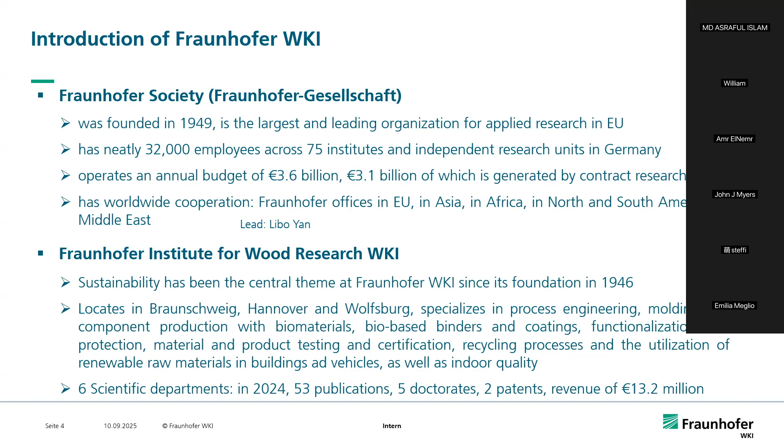All right, let us get started with a very brief introduction about my organization. For those of you who are not familiar with the Fraunhofer Society, it's the EU's largest organization for applied research, employing nearly 32,000 staff across 75 institutions in Germany. The Fraunhofer Society operates an annual budget of 3.6 billion euro, with 3.1 billion generated by contract research.

The Fraunhofer Institute for Wood Research is one of those institutions, located mainly in Braunschweig, Hanover, and Wolfsburg, with sustainability as the central focus for over 75 years. We have 6 scientific departments working on forest, wood, material testing and certification, as well as recycling and processing of building and construction demolition waste, and indoor air quality for structural application. Last year, we had 53 publications, 5 doctoral graduates, and 2 patents, generating a revenue of over 13 million euro.

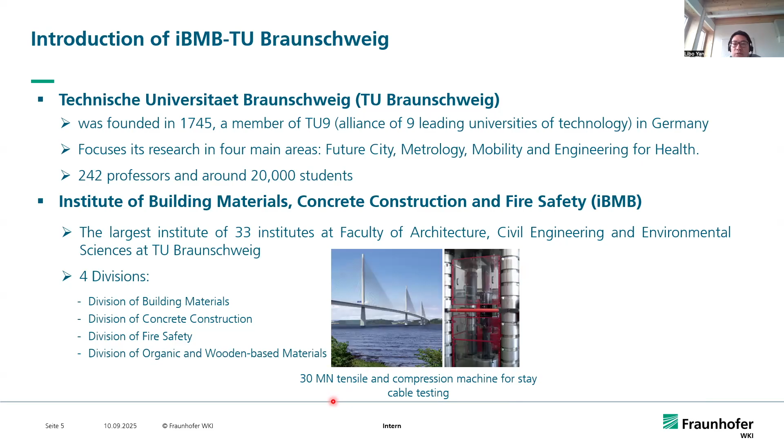Regarding TU Braunschweig, it is one of Germany's oldest universities and a member of TU9, an alliance of the 9 leading technical universities. It hosts the Institute of Building Materials, Concrete Construction and Fire Safety, IBMB in German, which is the largest institution at the Faculty of Architecture, Civil Engineering, and Environmental Science. At my institute, IBMB, we have state-of-the-art testing facilities, like a very unique 30 million Newton tensile and compression machine for stay cables. We also have Europe's leading testing facilities with a capacity of heat release rate up to 20 million watts.

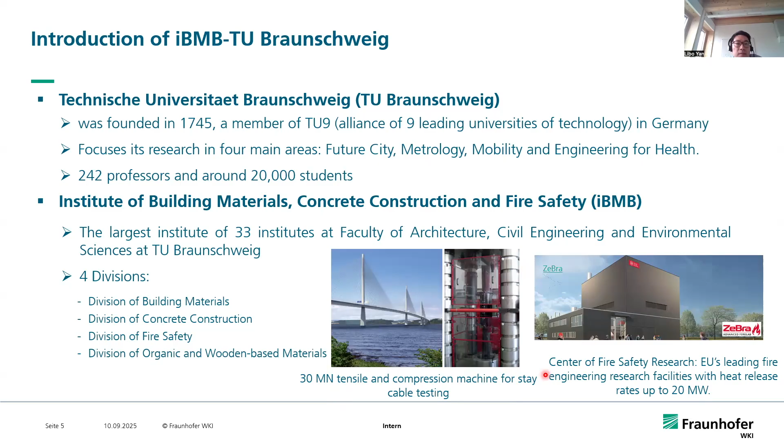So let us move on to the questions: what are natural fibers, and why should we use flax fibers to replace glass fibers for composite applications?

First, I will give a brief introduction about the classification of the polymer matrix and fiber materials. Based on the response to heat, the polymer matrix can be divided into thermoplastics and thermosets. In general, thermosets have better tensile properties, durability, and thermal stability, which are suitable for civil engineering applications, for example like epoxy.

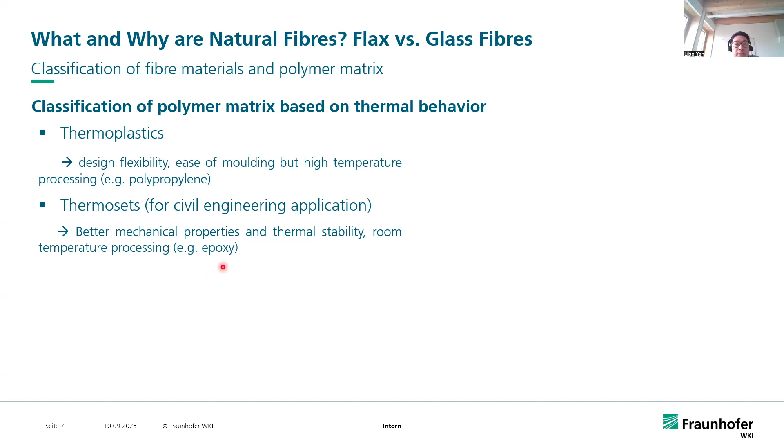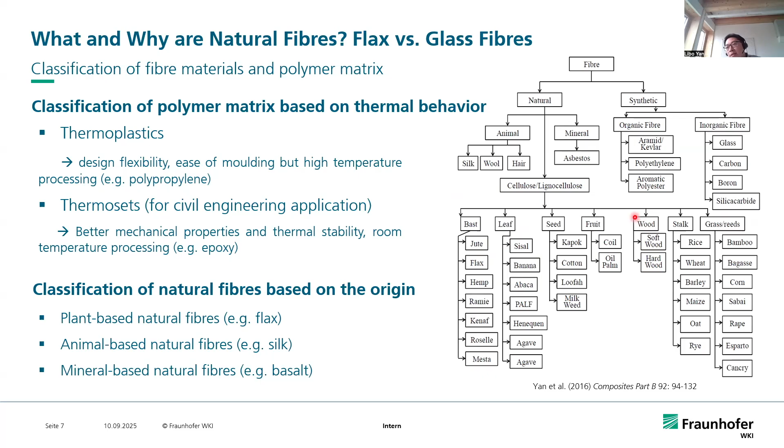For fiber materials, we have synthetic fibers like glass fiber, carbon fiber, and aramid fiber. For natural fibers, mainly based on fiber origin, we have mineral-based natural fibers, nowadays mainly basalt fiber, which is widely used in civil engineering; animal-based natural fibers, like silk and wool; and plant-based natural fibers, which is the focus of this talk: flax, jute, and also wood, since wood is also a kind of plant-based natural fiber.

So why should we use plant-based fibers? First of all, they are a renewable resource, coming from agriculture waste, using them to support circular and bioeconomy development. They have the potential to reduce greenhouse gas emissions, and normally the production of plant-based natural fibers is a less resource-intensive process, with less water, energy, and waste generated.

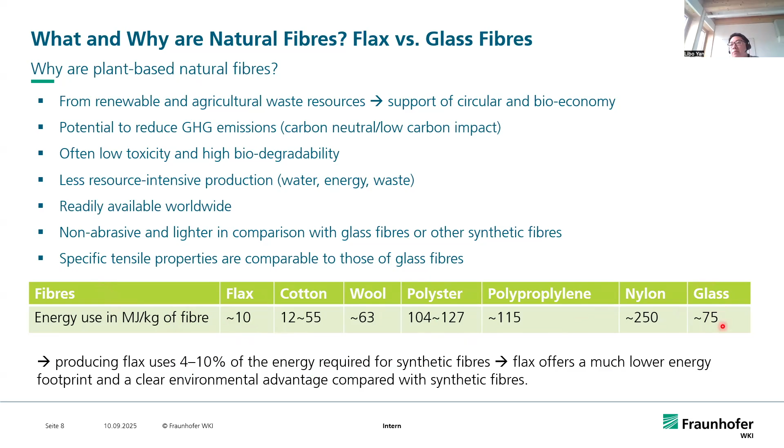Natural fibers are readily available everywhere. They are lightweight and cheaper compared with synthetic fibers such as glass. Most importantly, the specific mechanical properties of some plant-based natural fibers are very comparable to those of glass fibers. In this table, we can see that for the production of 1 kilogram of flax, the energy needed is much lower compared with other synthetic fibers such as glass. Overall, flax fiber offers a much lower energy footprint and a clear environmental advantage compared with synthetic fibers used in composite engineering.

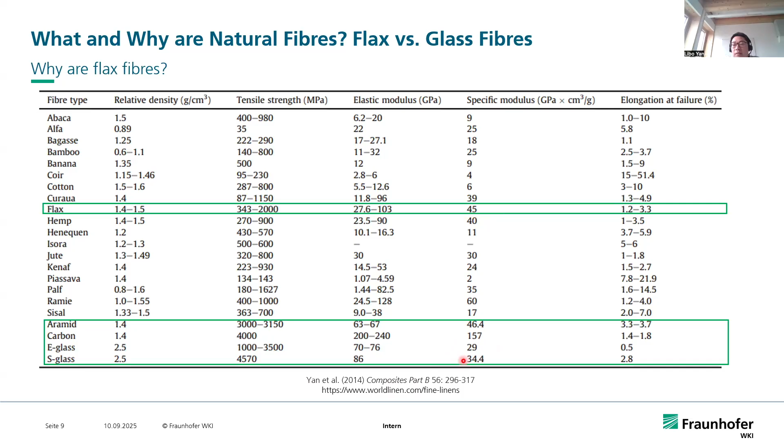Let's take a look at the specific modulus, for example. The flax fiber has a specific modulus higher than most of the plant-based natural fibers, which is even higher than that of e-glass fibers, as you can see here. So that's why flax fiber combines lightweight, renewability, and glass-comparable stiffness, making flax fiber highly attractive for composites in construction applications.

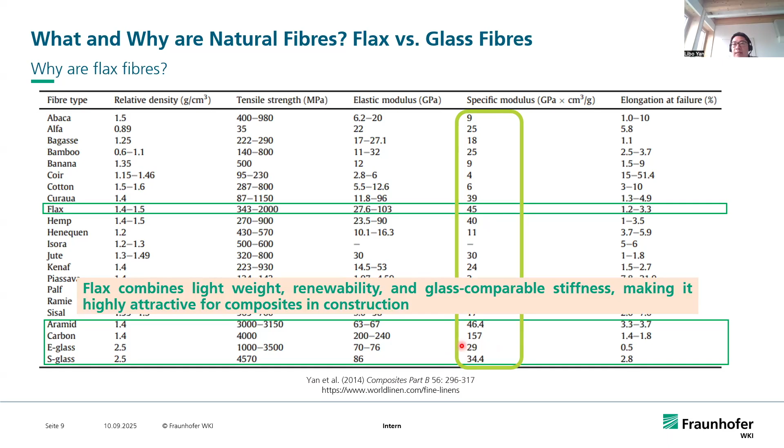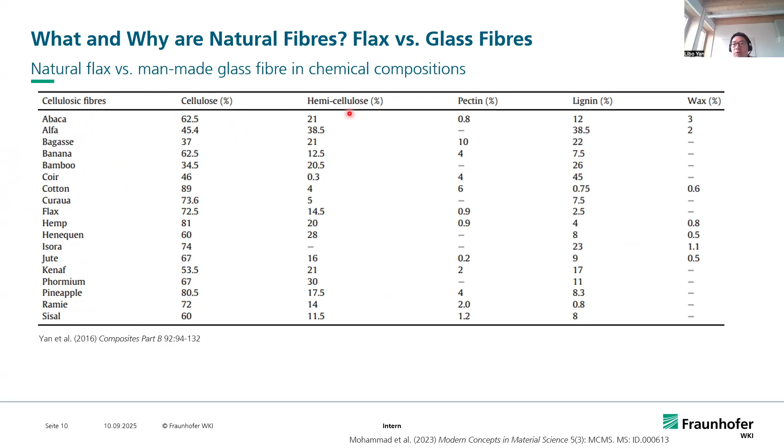By contrast, glass fibers have a stable chemical consistency, which is mainly dominated by silicon, around 54% to 65%, with other different oxides to change the function.

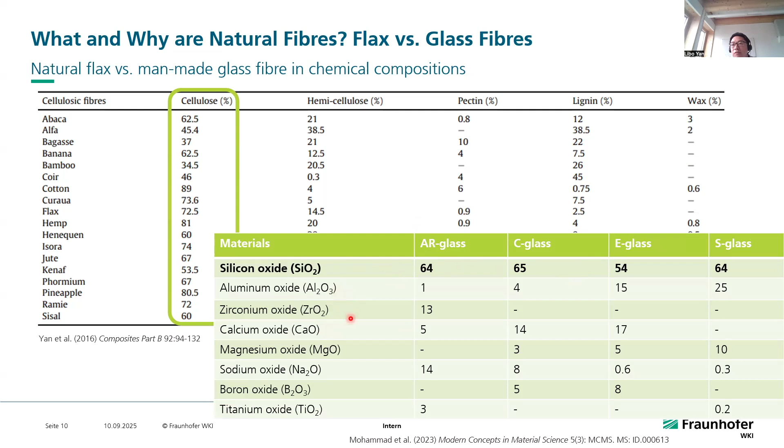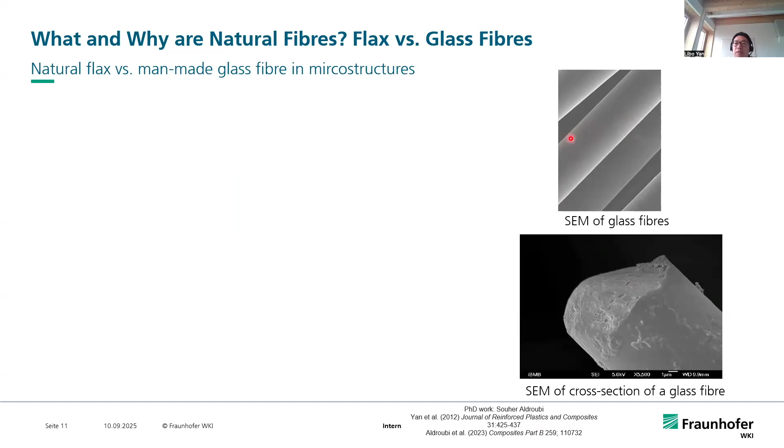So how about the comparison of microstructure between flax fiber and glass fiber? Let's take a look. For glass fibers, which have a very uniform structure, you can see a very smooth surface, and the diameter is quite constant along the length.

But for plant-based natural fibers, like flax fiber, which show high variation, you can see the existence of natural defects, like kink bands, and non-continuous diameters along a flax fiber, and also the irregular cross-section of individual fibers.

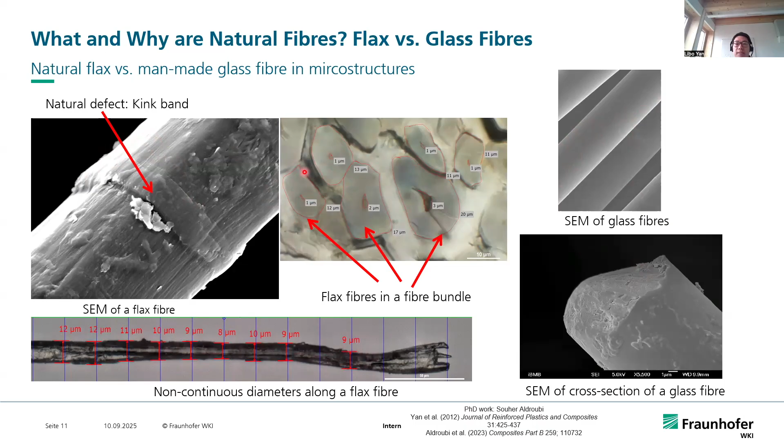After that, they go through the drying process once again. The stalks of the flax plants were broken, scutched, and hackled, so we get the final short fibers. These short fibers can be further processed into fabrics for composite application. The short fibers are spun into yarns, and the yarns are woven into different fabrics for engineering application.

In my institute, we have a textile machine which allows us to design fabrics with different textures.

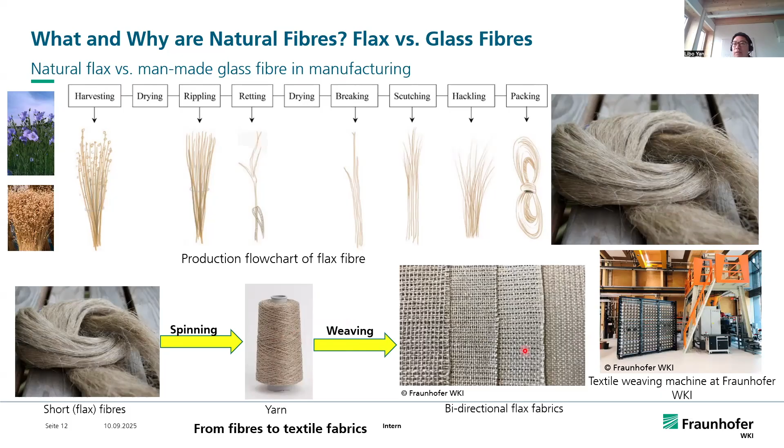Let's take a look at the manufacturing of glass fibers. I would say the production of glass fiber or glass fiber yarns is an industry-standardized process. Raw materials like silicon and calcium oxide are mixed and melted in a furnace at a temperature of about 1,700 degrees Celsius to form a homogeneous glass.

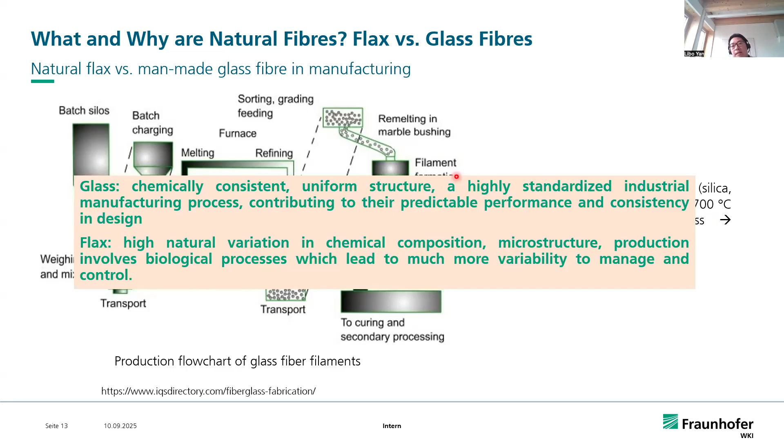After that, it's refined and drawn into glass filaments with very constant structure. In comparison, we can see glass fibers on one hand are chemically consistent, have a very uniform structure, and a highly standardized industry process, which contributes to predictable performance and consistency in design for engineering applications. But flax fibers have high natural variation in chemical composition and microstructure. The production involves biological processes like retting and mechanical processes like scutching, which leads to much more variability to manage and control.

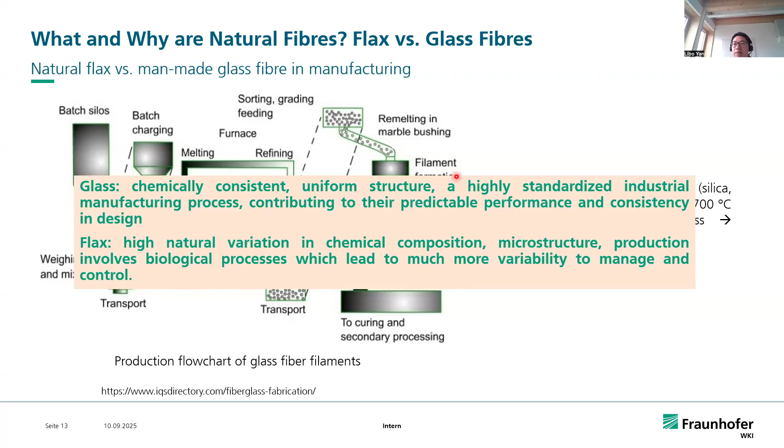So after the comparison between flax and glass fibers, let's take a close look at the mechanical performance of flax fiber, yarn, fabrics, and FRP composites.

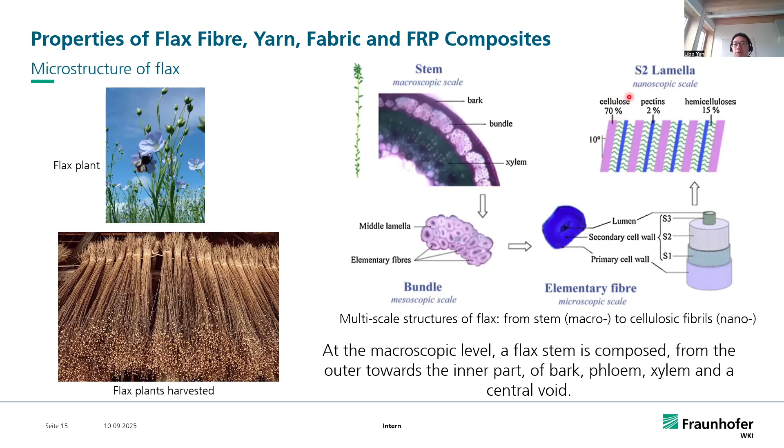At the nanoscale level, we see the chemical compositions bonded together, meaning the cellulose, pectins, and hemicellulose.

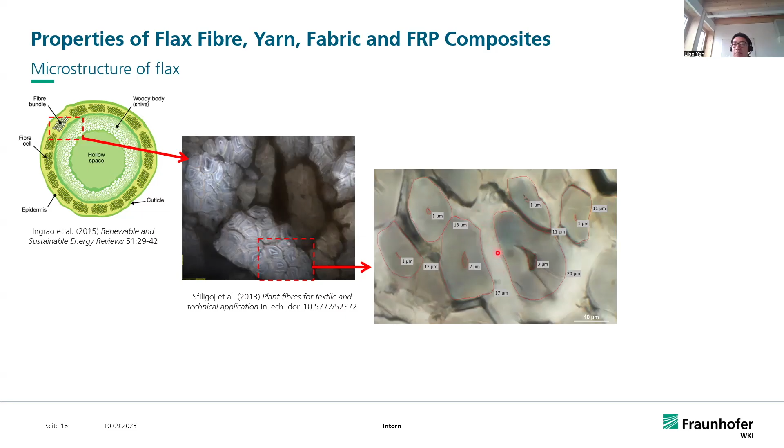Let's move on and have a close look at the fiber bundle. The fiber bundle is the component we use to extract flax fibers to produce textiles. As you can see under the microscope, we can see the individual flax fibers, which are connected at the so-called middle lamella by pectin. Each fiber has a multi-cell structure, which will be discussed further in the coming slide.

Let's take a look at the schematic of the flax single fiber, which is mainly composed of the primary cell wall and the secondary cell wall. The secondary cell wall encloses the hollow lumen, which is responsible for water uptake.

The secondary cell wall can be further divided into S1, S2, and S3 layers. The S2 layer has the largest thickness and contains most of the microfibrils. The cellulose microfibrils are the components that determine the tensile strength and tensile modulus of the flax fiber.

Those microfibrils are further orientated with an angle around 10 degrees with the longitudinal direction of the fiber. This microfibril angle also significantly determines the mechanical performance of the fibers. In general, a plant-based natural fiber with a smaller microfibril angle will have higher tensile strength, while a larger angle means smaller tensile strength.

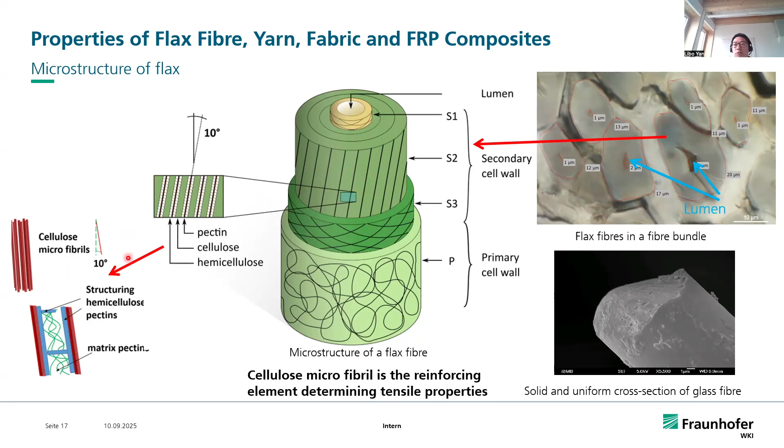Let's move on to the tensile properties of the single flax fibers. The flax fibers are extracted from a yarn of unidirectional flax fabrics. In these tensile stress-strain curves, we can see significant scatter of the results. On average, the tensile strength of the single flax fiber is around 850 to 1000 megapascal, the modulus is about 55 to 63 gigapascal, and the failure strain is about 2%.

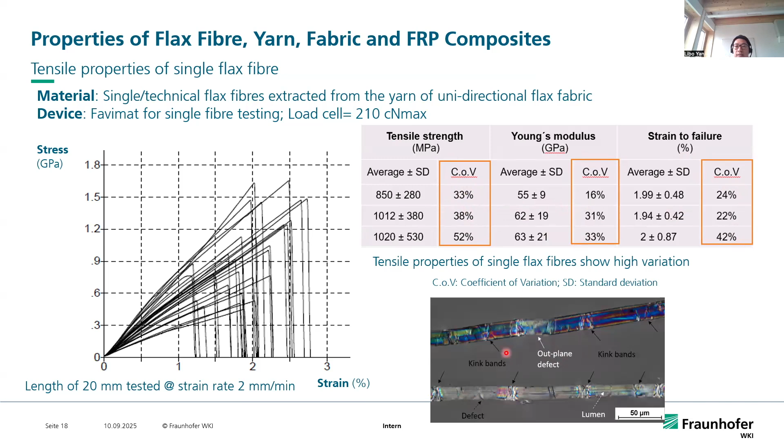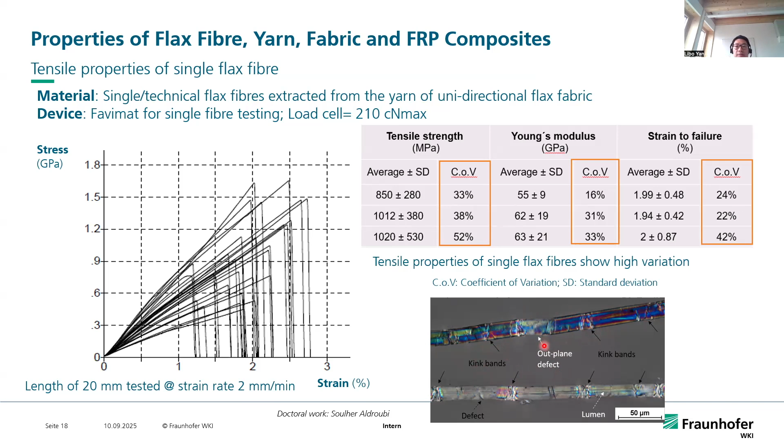Next, let's move on to the flax yarn. The flax yarns are also extracted from the same fabric. The average tensile strength is about 600 megapascal, a significant reduction from the 800 to 1000 for the single fiber. There was also a significant reduction in the modulus of elasticity compared with the single fiber.

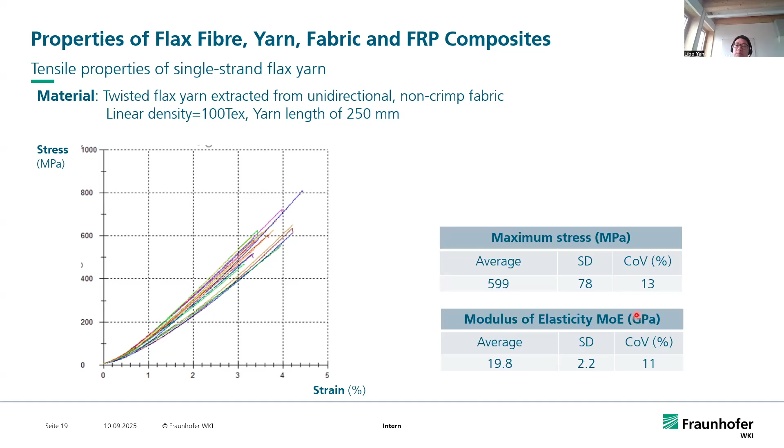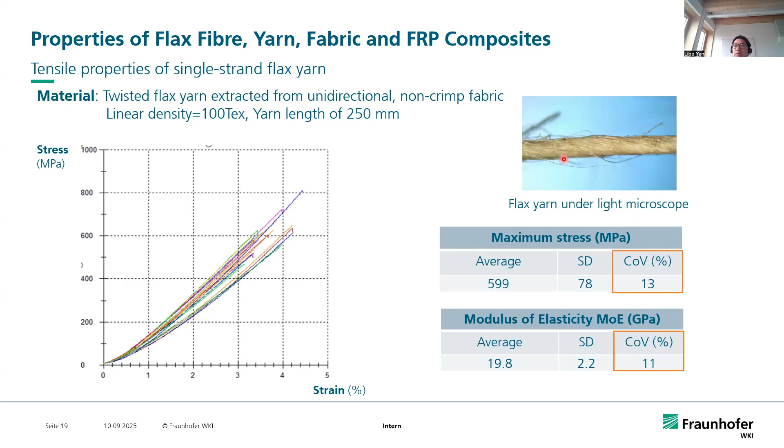But what is interesting is the reduction in the coefficient of variation, from 20 to 50% for the single fiber dropped to 11 to 13%. What does that mean? It means when we twist the short fibers into yarn, we are able to reduce the variation and make the properties much more predictable.

Let's continue and move on to the tensile properties of the unidirectional flax fabrics. There is a further reduction in the tensile strength from 600 megapascal of the yarn to roughly 210... for the fabric, and the modulus is also reduced significantly. It's quite interesting - let's take a look at the coefficient of variation, less than 10%.

So from the evolution of the mechanical properties of the flax fiber to yarn to fabrics, we can see the absolute values like tensile strength and tensile modulus decrease, but the behavior becomes much more predictable and consistent. This is a clear advantage of using flax fabrics for engineering design and structural application.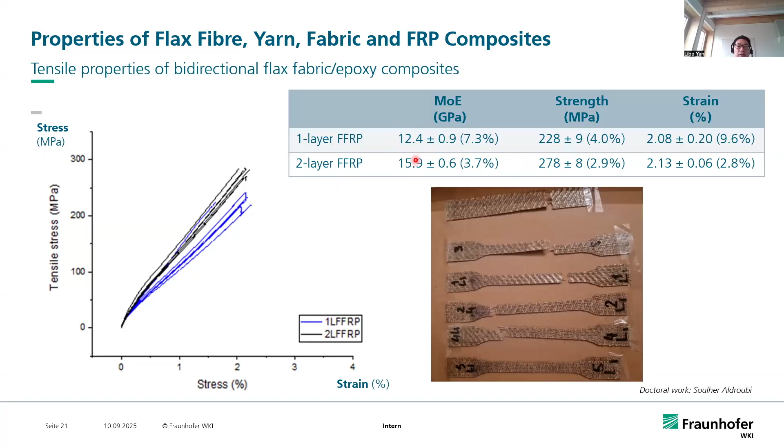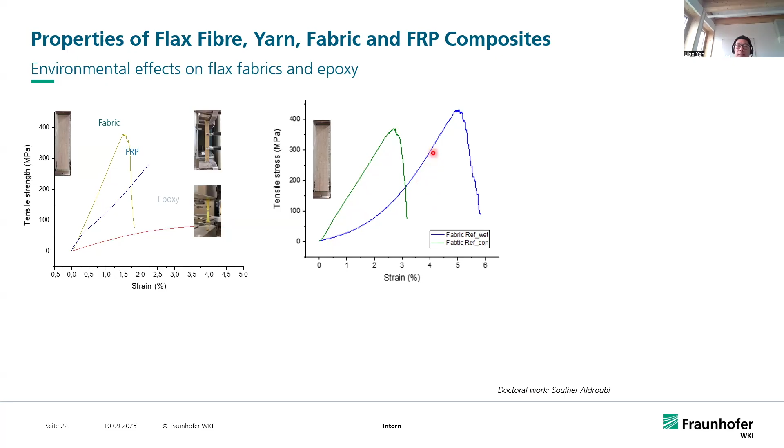In this figure, you can see the flax fabric tested in tension at the dry condition. The blue line is the flax fabric after 24 hours of exposure to water and tested in the wet condition. There was a significant reduction in the Young's modulus, and a slight increase in the tensile strength of the fabrics.

In this figure, we can see for the post-cured epoxy coupon, when tested at the standard condition of 20 degrees Celsius, 65% relative humidity, the tensile strength can reach up to 80 megapascal. But if the coupon is tested at different temperature, we see a significant reduction in the tensile strength for the epoxy itself. So what kind of information can we get from here?

So flax epoxy composites offer good performance, but we need to be very careful and consider the environmental exposure and curing conditions when designing natural fiber reinforced polymer composites for real applications.

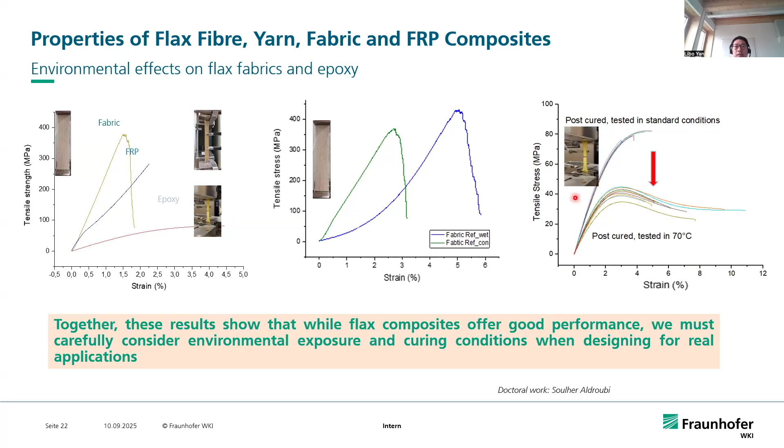Let's move on to the hygrothermal aging of flax epoxy composites at different environment conditions. This figure shows flax epoxy composites exposed in the 70-degree oven for 6 weeks. Here are the reference samples without the 70-degree exposure, and those curves are the samples exposed at 70 degrees for 6 weeks.

We can see compared with the reference sample, there is even a slight increase in the strength and stiffness.

Let's move on to take a look at flax FRP composites exposed to water at room temperature for 6 weeks. You can see compared with the reference samples, there was a significant drop in the tensile strength.

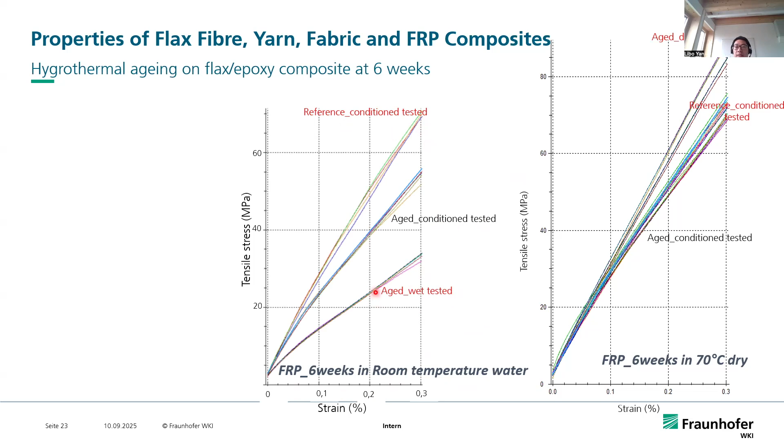Let us take a look at how the flax FRP composites behave at 70-degree Celsius hot water conditions for 6 weeks. Compared with the reference samples, there was a further reduction in the tensile strength.

Those results highlight that moisture is the main enemy of flax epoxy composites. Temperature alone, below the glass transition temperature of the epoxy, is tolerable, but heat plus water accelerated the degradation of the fiber reinforced polymer composites significantly.

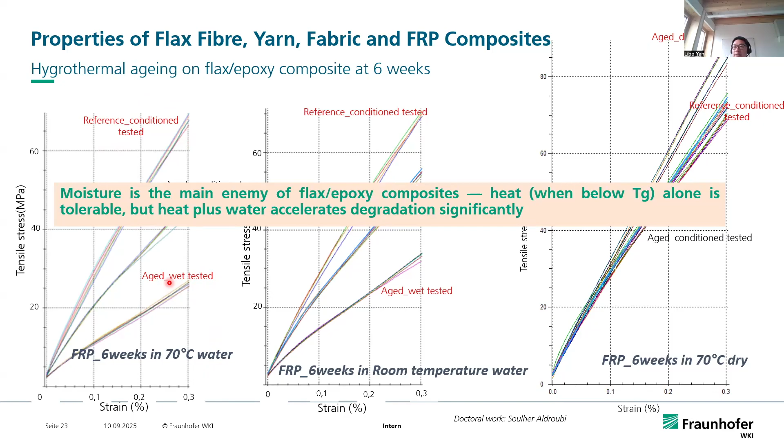Let's have a close look at the hygrothermal aging effect on flax epoxy composites over different exposure times. The left figure gives the flax FRP composite tensile strength exposed to 70-degree oven conditions. Compared with the reference samples, after 3 months, there was only a small reduction in the tensile strength, 8%.

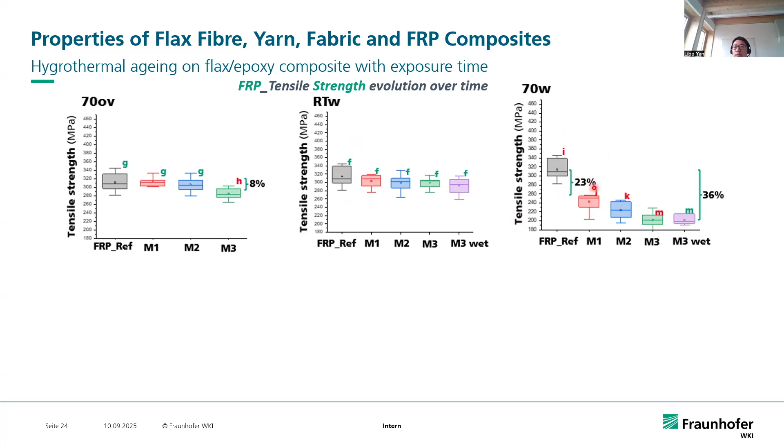For the flax epoxy composites at room water conditions, compared with the reference after 3 months, the reduction is also very small. But when we exposed the flax FRP composites to 70-degree water conditions, even in the first month, we can see a 23% drop in the tensile strength. After 3 months, further reductions were also observed.

Let's take a look at the E modulus of the flax FRP composites over time. For the E modulus, compared with the reference sample, the samples exposed at 70 degrees, we can even see a slight increase in the modulus.

For the composites exposed to water at room temperature, you can see significant reduction at month 1 and month 3. For the composites exposed to 70-degree water conditions, in the first month there was a 32% drop in the modulus, and afterwards further serious reduction in the modulus.

So those results tell us flax epoxy composites tolerate modest temperature, but water, especially hot water, can result in a rapid loss of strength and stiffness over time.

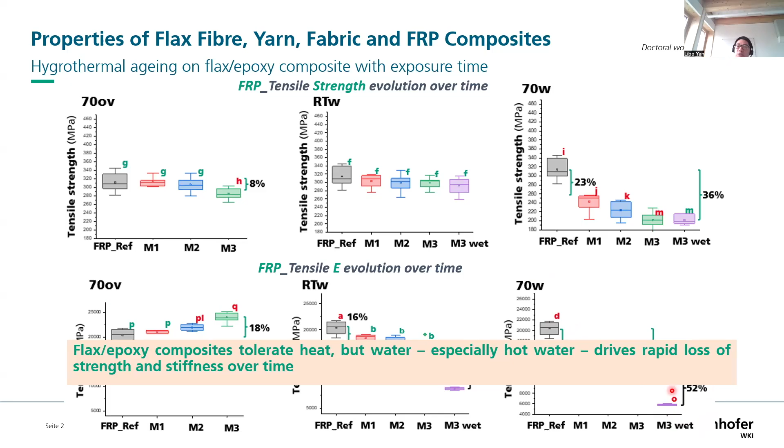So we can make a conclusion here: flax fabric is quite robust under hygrothermal aging, but when the fabrics are combined with the epoxy matrix, the fiber-polymer matrix interface becomes the weak link.

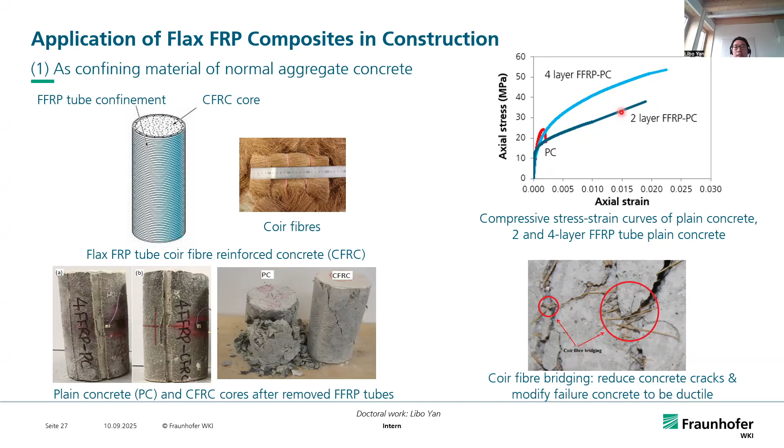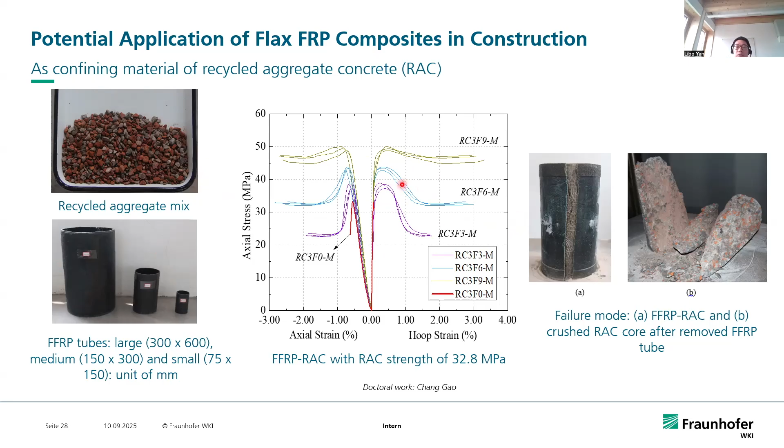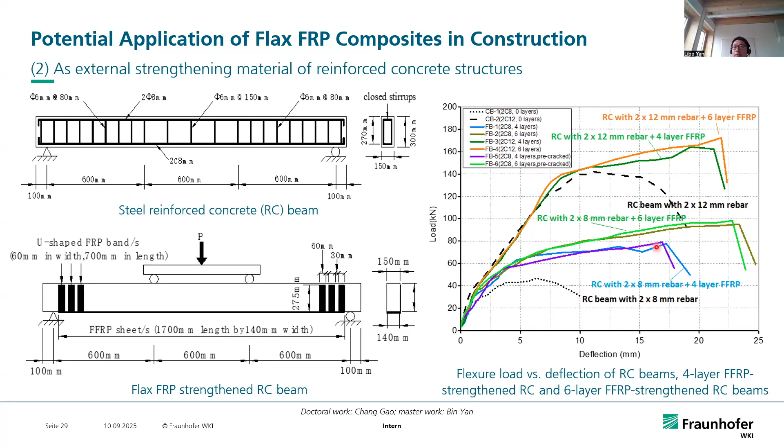Another application of flax FRP is as an external strengthening material for existing reinforced concrete structures. We used U-shape and L-shape flax FRP sheets to reinforce concrete beams. As you can see in the load and deflection curve, compared with the reinforced concrete beam, the use of 4-layer or 6-layer flax FRP significantly increases the load carrying capacity, the ductility, and the energy absorption capacity.

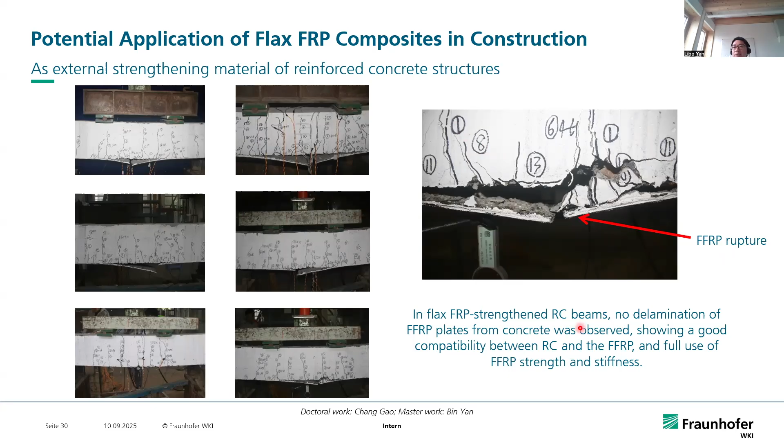It's quite interesting to point out that for the flax FRP reinforced RC beam, the typical failure is rupture of the flax FRP, which means the full tensile strength of the composite can be used. But for traditional glass or carbon FRP strengthened RC beams, we know debonding is always a critical issue.

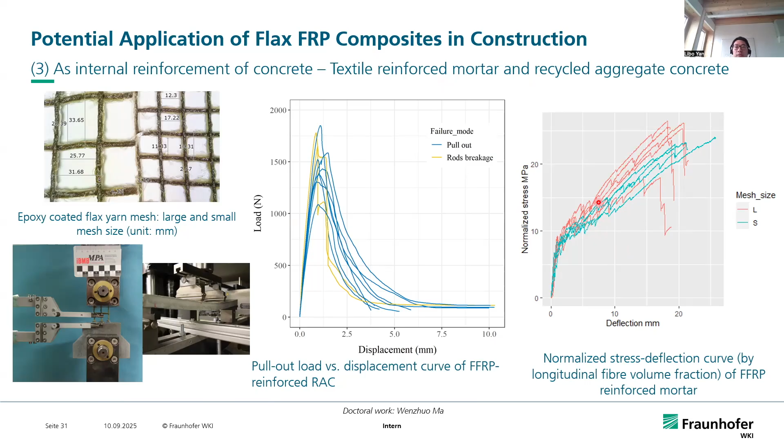Another application is as internal reinforcement of concrete, for textile reinforced mortar or textile reinforced concrete structures. We use epoxy-coated flax mesh as the internal reinforcement to increase the load carrying capacity of the concrete and to modify the crack distribution of the concrete. This is an interesting example using flax mesh to develop textile reinforced mortar, the so-called FlaXship, at the German concrete canoe competition with our students.

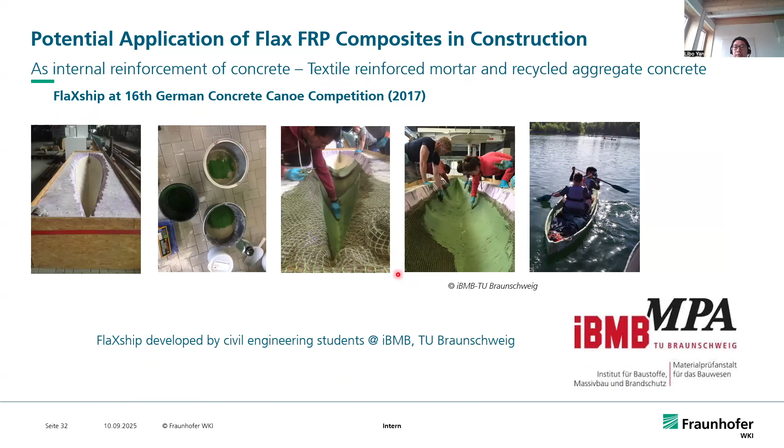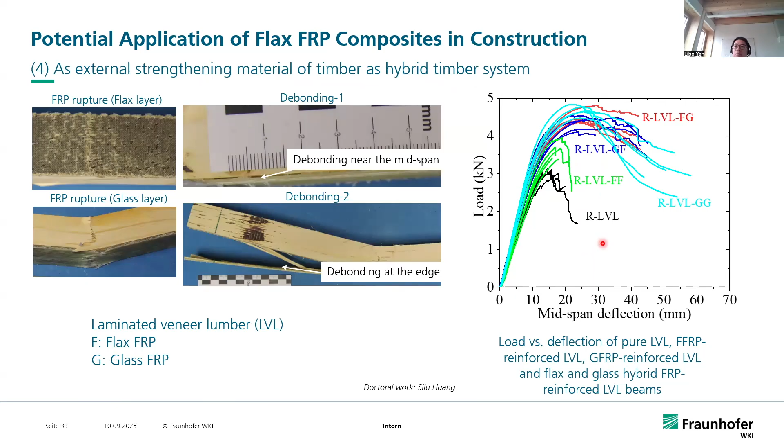In our research group, we also carried out long-term durability tests of full-scale flax FRP wood, carbon FRP wood, and flax-glass hybrid FRP wood panels, exposed to natural aging and sustained loading for almost 2 years. Those long-term tests showed promising results for using flax FRP combined with wood in hybrid system applications.

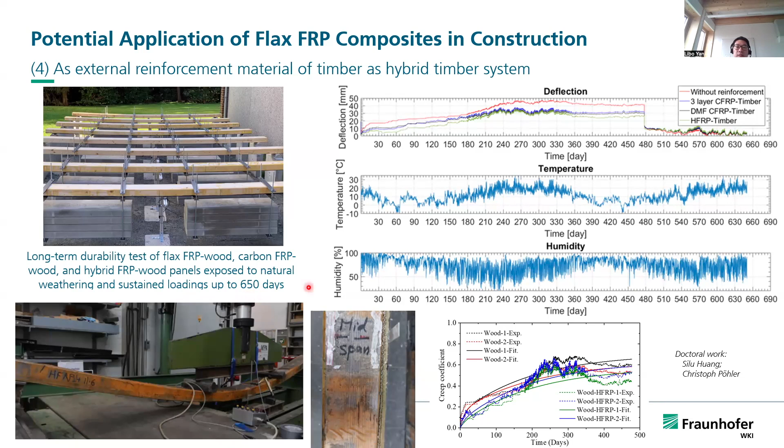Of course, fire safety is a very critical issue for the application of natural flax FRP composites in construction. In our team, we did a lot of research to improve the fire performance of flax fabric reinforced polymer composites, and also with wood.

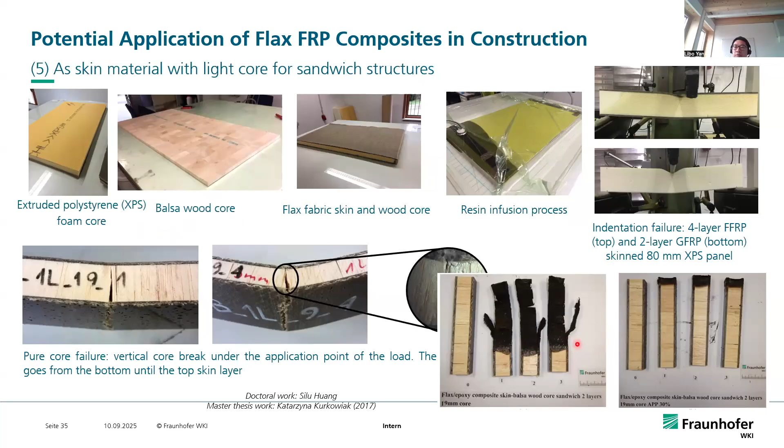After the discussion about potential applications, we move forward to how those concepts can be realized in practice. In the next part, I would like to show some pilot projects using flax fiber reinforced polymer composites in reality, to show the feasibility and performance of flax FRP composites for practical application.

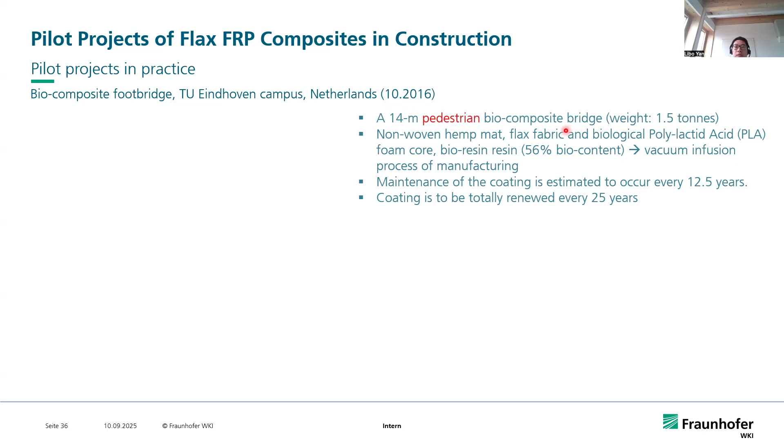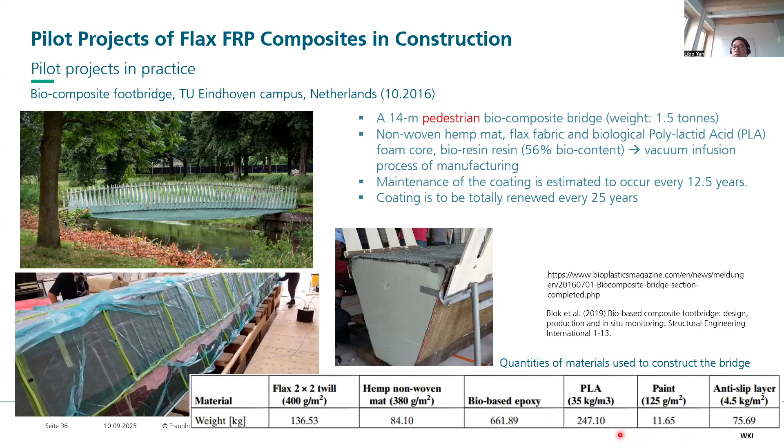The first pilot project is a 14-meter footbridge opened in the Netherlands in 2016. The composite bridge has a weight of 1.5 tons, which is very lightweight, made of non-woven hemp mat flax fabrics and PLA foam core. The mat fabrics and PLA foam are bonded by bio-resin using the vacuum infusion process. In this table, you can see the different materials used for this bridge. This is the first large scale demonstration of biocomposites in infrastructure application.

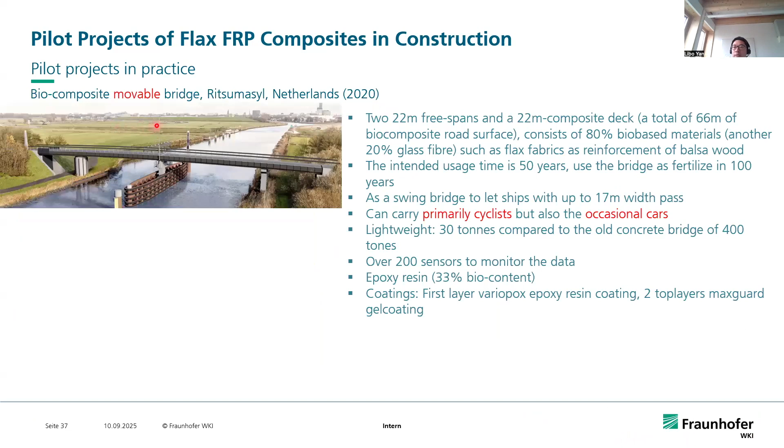In 2020, the world's first biocomposite movable bridge was opened in the Netherlands. This bridge includes two 22-meter free spans and another 22-meter composite deck, in total 66 meters of biocomposite road surface. The composite deck consists of 80% bio-based material from flax fibers, fabrics, and balsa wood, and another 20% from glass fibers. This bridge was designed for 50 years of application, and it is expected that at the end of its service life, the bridge can be used as fertilizer.

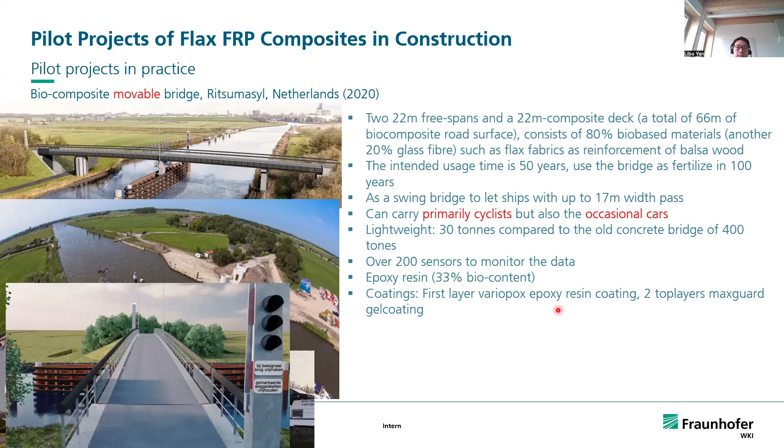This bridge also allows ships to pass by, up to 17 meters wide. It is mainly designed to carry cyclists, but also occasional car transportation. Compared with the older concrete bridge of 400 tons, the composite bridge is about 30 tons, which is a significant reduction. Over 200 sensors were implemented to monitor long-term performance, and coatings are used to prolong the durability of the flax fiber reinforced polymer composites. Here you can see the road surface of the composite deck.

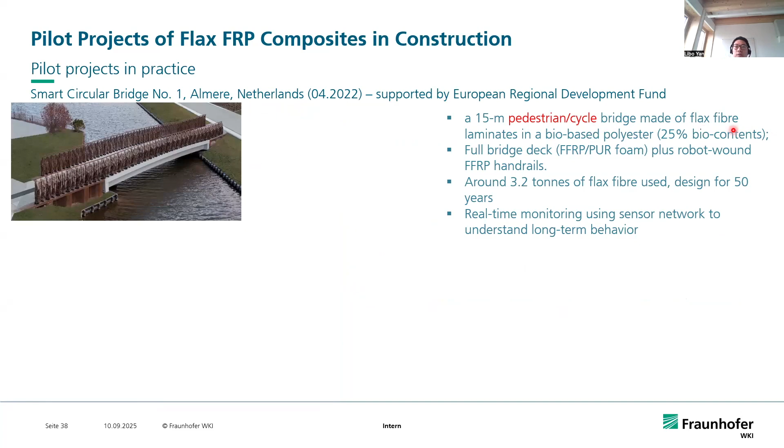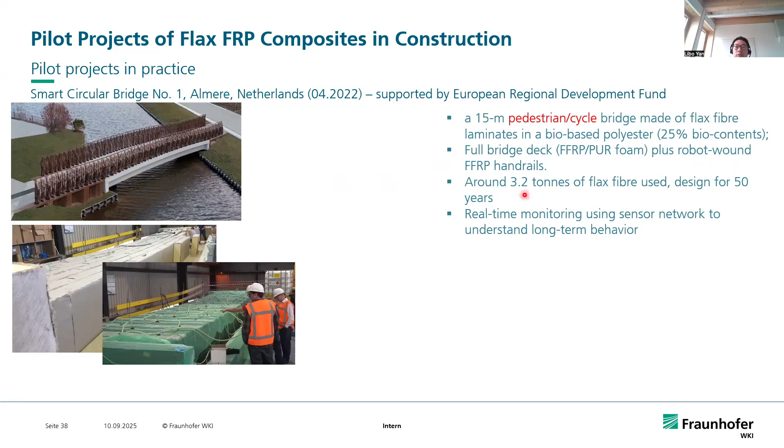In 2022, still in the Netherlands, the Smart Circular Bridge #1 was opened. This is a 15-meter pedestrian and bicycle bridge made of flax fabric composites in a bio-based polyester. The composite deck is made of flax FRP and PUR foam, and robot-wound flax FRP is used for the handrail of this project. In total, about 3.2 tons of flax fabrics were used, designed for 50 years, with real-time monitoring using sensor networks to understand long-term performance.

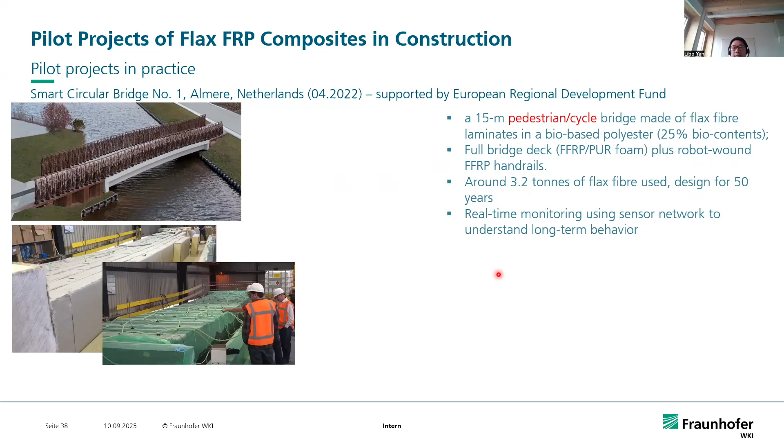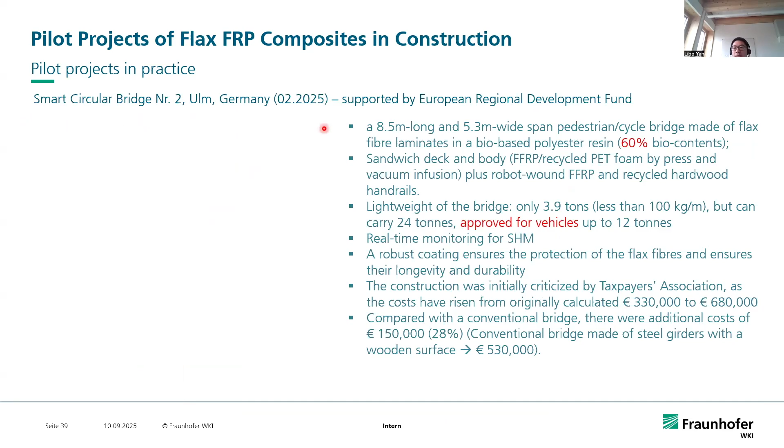All right, let's move on to the last pilot project. The second smart circular bridge opened in Ulm, Germany this February. It's an 8.5 meter long, 5.3 meter wide span pedestrian and bicycle bridge, mainly made of flax fibres and bio-based polyester resin.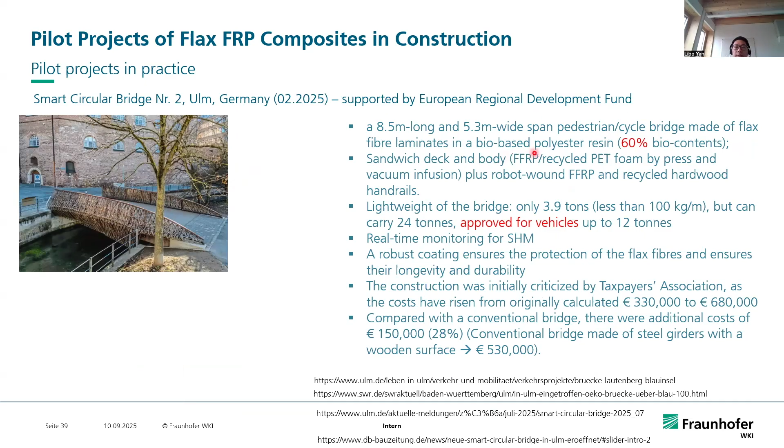The bio content of the resin is increased to 60%. The bridge itself is very lightweight, just 3.9 tons, but very important to know is that the bridge can carry 24 tons of load, and is approved for vehicle transportation every day up to 12 tons.

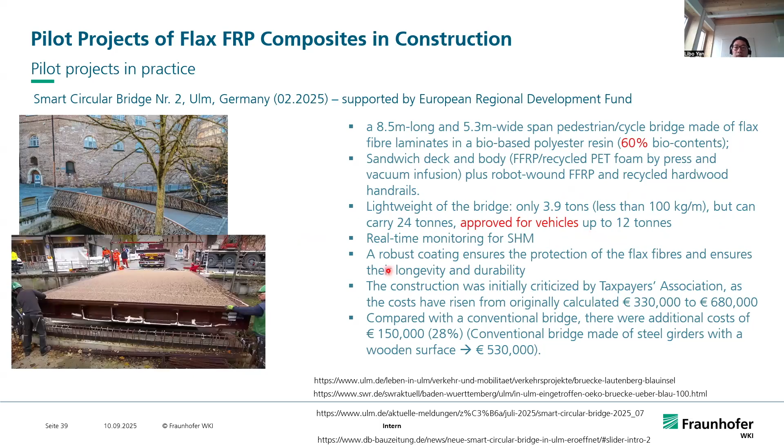Robust coatings are used to improve durability, but this project was initially criticized by the Taxpayer Association in Germany, as the cost rose from the original 330,000 euros to 680,000 euros at the end. A calculation and comparison was made between the conventional bridge made of steel girders and the wooden surface, showing a 28% increase in the budget.

So let's have an overview of those 5 bridges, from the initial footbridge to the world's first movable bridge, and now to the Ulm bridge, which is even suitable for the transportation of cars. We can see the advancement of the development of bio-based composite bridges in the past few years. Those pilot projects show the high potential of using flax fiber reinforced polymer composite bridges for infrastructure applications.

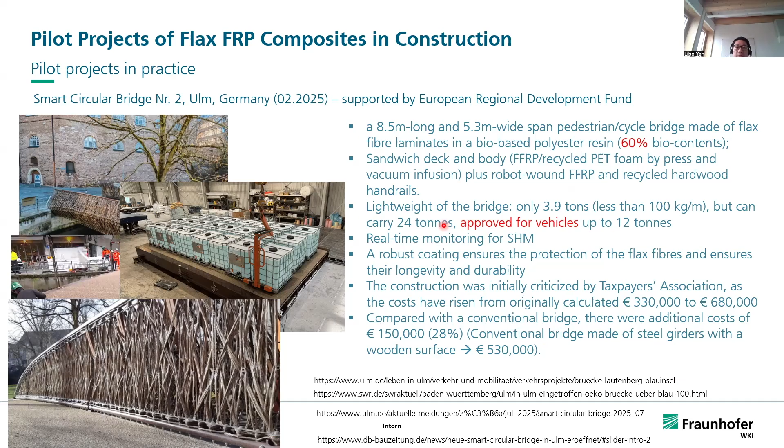But on the other hand, we also need to be very careful about the challenges of using those materials. I think the first major challenge is the large material variation. We know the variation in mechanical properties at the fiber level. So even with variation reductions at the yarn and fabric level, it still remains high compared with carbon fiber or glass fiber. In this case, we have difficulty predicting the material properties accurately.

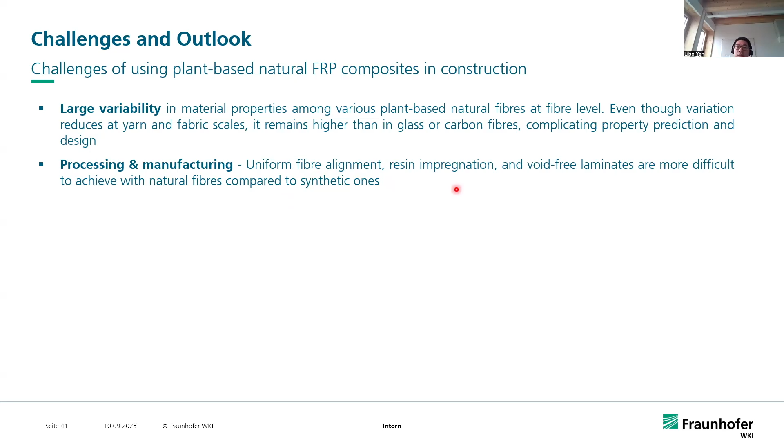Another problem is about manufacturing. Compared with synthetic fibers, because of the hollow microstructure of natural fibers, it becomes typically hard to have uniform fiber alignment, resin impregnation, and to avoid voids. And we know natural fibers absorb moisture, leading to swelling, matrix and fiber debonding. This could be an issue for synthetic fiber as well.

But from the hygrothermal aging tests, we see significant reductions in strength and modulus over time, particularly in wet and warm conditions. Fire safety is also a critical issue for all kinds of nature-based materials, like flax and wood. Compared with glass or carbon FRP, flax FRP typically has a lower stiffness, about 10 gigapascals, and for strength, about 250 megapascals - much smaller compared with glass or carbon FRP.

And even though there are some pilot projects existing, there are no well-established design codes or testing standards for durability, which limits wide adoption in mainstream construction. It should also be pointed out that due to inflation in the past few years, the cost of bio-based fabrics has increased significantly. As you can see, the pilot projects show that the cost could be higher than conventional steel or concrete bridges due to small scale production, high resin cost, and limited industry supply chains.

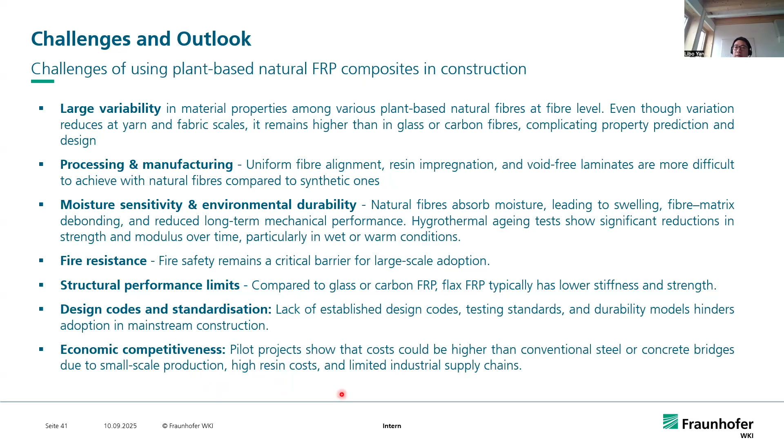But myself, I'm quite confident there will be a promising future for the use of natural fiber reinforced polymer composites in construction, because the pilot projects in Netherlands and Germany already show the advancement from pedestrian bridges to movable bridges and even to vehicle-capable bridges. Those real-world examples build confidence in performance, durability, and monitoring strategies for using them.

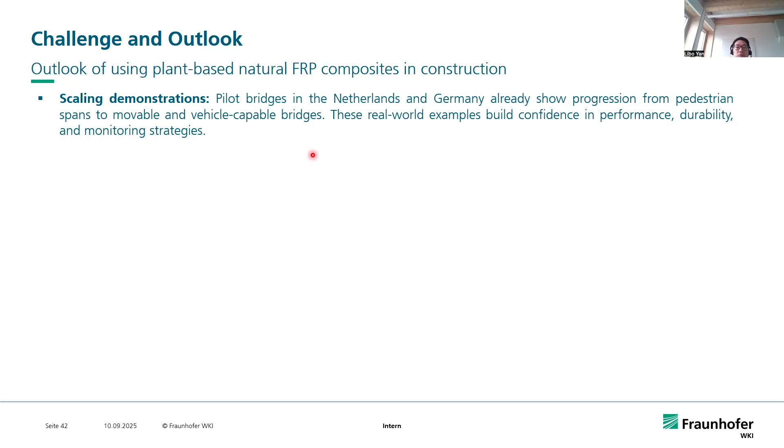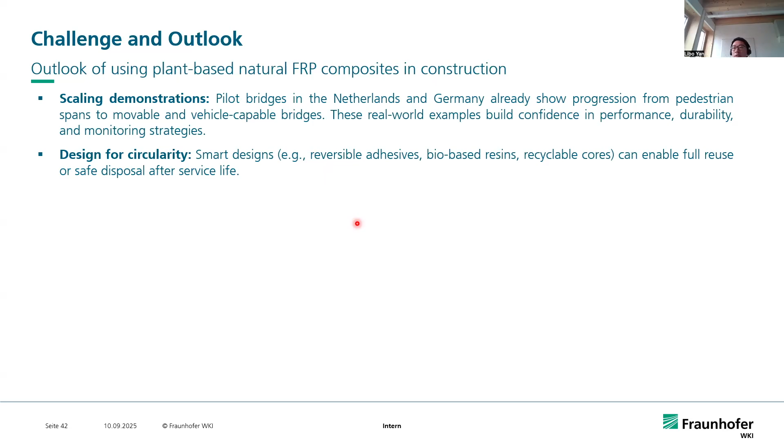We also focus on smart design to fully reuse or safely dispose of the bio-based structures after their service life. And now we have a lot of supportive policies, like in Germany, the national bioeconomy strategies, and the growing demand for sustainable building materials is driving adoption. As manufacturing scales up, cost will decrease, making natural fiber reinforced polymer composites more competitive with glass fibers.

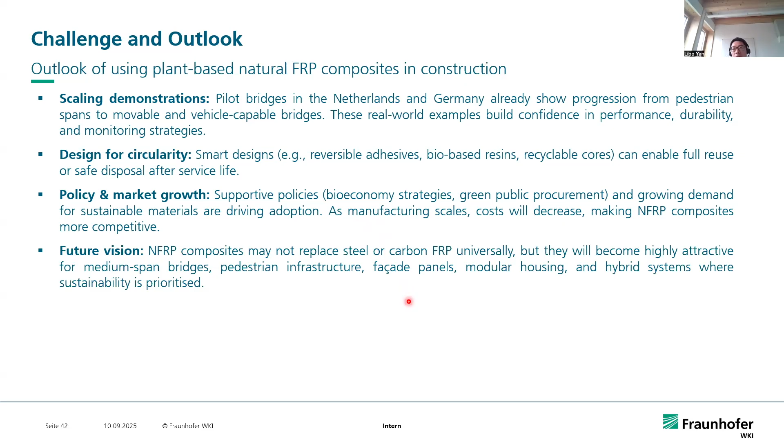In my vision, natural FRP composites may not fully replace steel or carbon FRP, but they will become highly attractive for medium-span bridges, pedestrian infrastructure, facades, modular housing, and hybrid systems where sustainability is important. So overall, the challenges are high material variation, durability issues, fire safety, and economics. But the outlook is promising - with growing pilot projects, hybrid designs, and smart monitoring, this will pave the way towards wide adoption of natural fiber reinforced polymer composites.